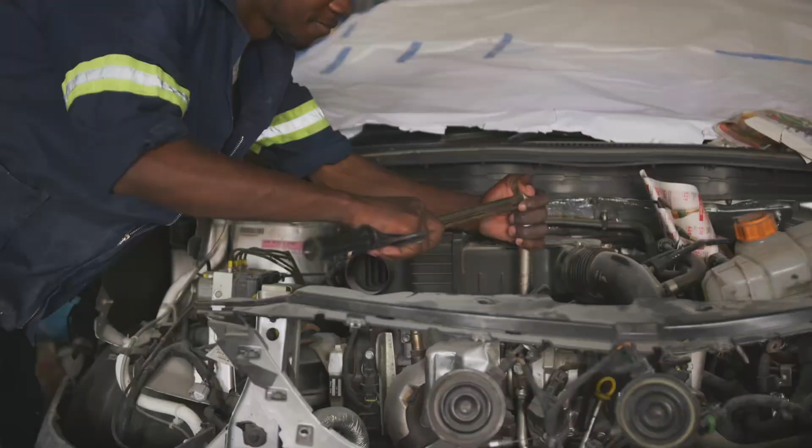Want your car to last over 500,000 miles without a single major repair? It's not magic. It's daily habits that 99% of drivers ignore. And at the end, a bonus tip no one talks about. It could save you thousands, so watch till the end.

Habit number 1. Protect your engine from the first minute. Every engine start is a stress test, especially when the engine is cold. Many drivers still believe it's good to let the car idle for 5 minutes before driving. But the truth is, your engine doesn't need to sit. It needs to move, gently and with minimal load.

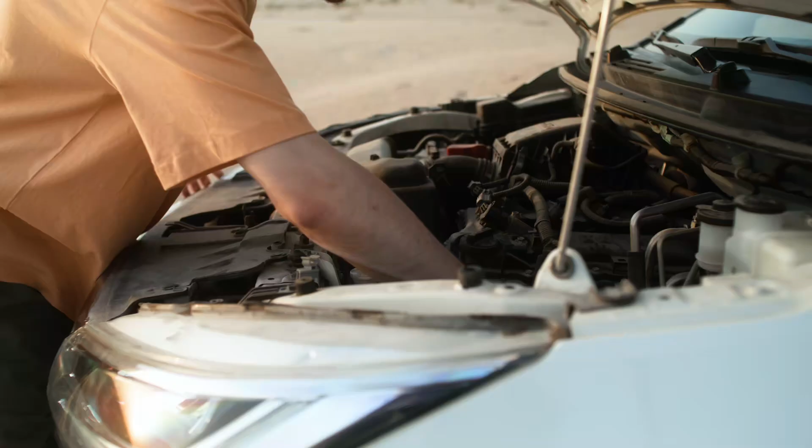When you start the engine, oil hasn't yet reached critical components like the camshaft, bearings, or turbo if your car has one. So if you rev the engine or accelerate hard right away, you're creating direct metal-on-metal contact. This kind of wear isn't noticeable at first, but over time it builds up and it drastically shortens your engine's life. So what should you do instead?

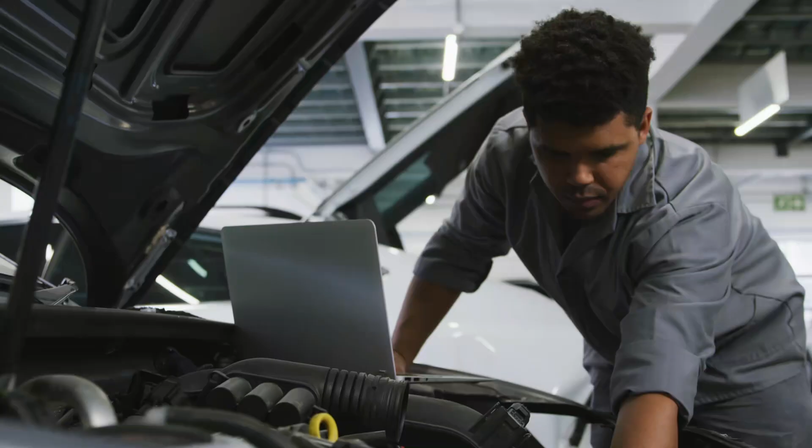Start the engine, wait 15 to 30 seconds, just enough for the oil to start circulating. Then begin driving slowly and smoothly. Keep RPMs low, avoid aggressive throttle or braking. Let the engine warm up under light load, exactly as it was designed to. This one simple habit done daily can extend your engine's life by hundreds of thousands of miles. If you want your car to reach 500,000 miles or more without a major repair, it all starts with the first 5 minutes of every drive.

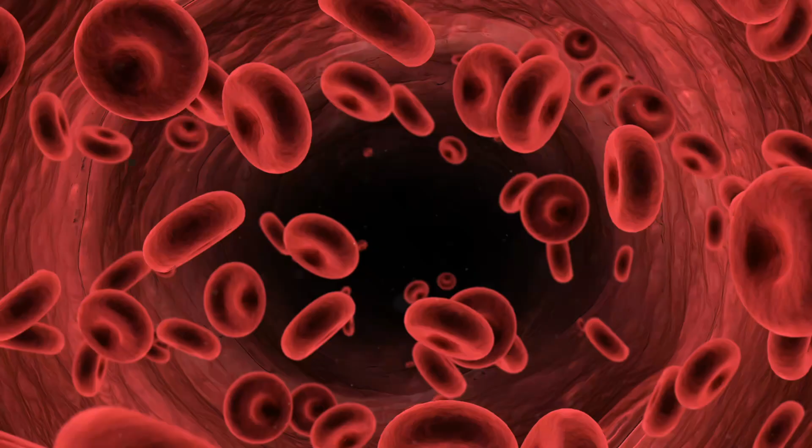Habit number 2. Check your oil like a pilot, not a passenger. Most drivers ignore their oil until the dashboard light blinks. By then, it's already too late. Engine oil is the lifeblood of your car. It cools, cleans, lubricates, and protects everything inside your engine. Driving with low or dirty oil is like running a marathon in flip-flops. You might move, but you're wrecking everything with every step.

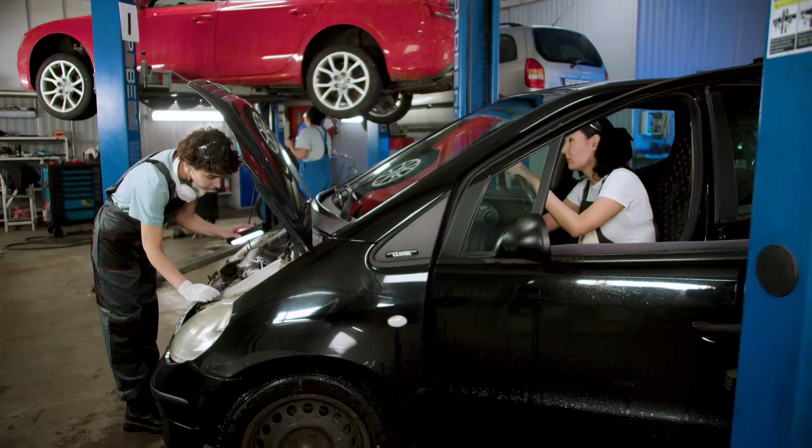So here's the habit. Check your oil at least once every 2 weeks. Pop the hood, pull the dipstick, and take 30 seconds to look at the color, texture, and level. Is it dark and gritty? Time to change it. Is it low? Top it up immediately. Even running half a quart low can cause long-term engine damage.

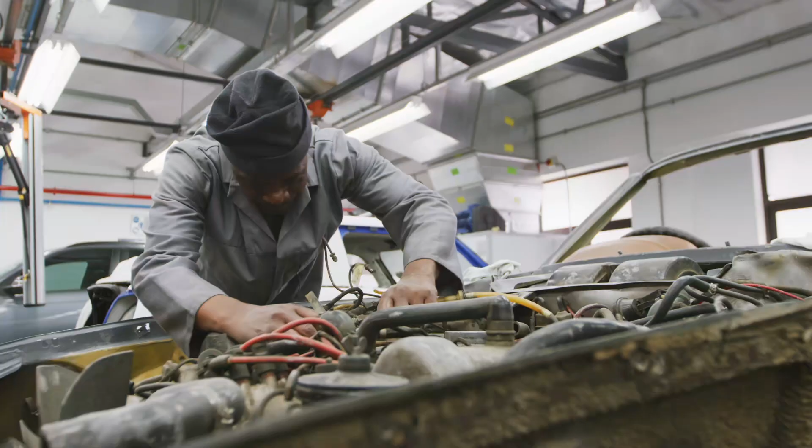Modern engines, driving conditions, and oil types vary. Some cars need oil changes every 3,000 miles. Others can go 10,000 plus. Check your manual and build a habit around that, not vague internet advice. Remember, it's cheaper to buy oil than a new engine. A bottle of synthetic oil costs $10. A rebuilt engine? $4,000 and months of headaches. Want to hit 500,000 miles? It starts with checking the dipstick before trouble checks you.

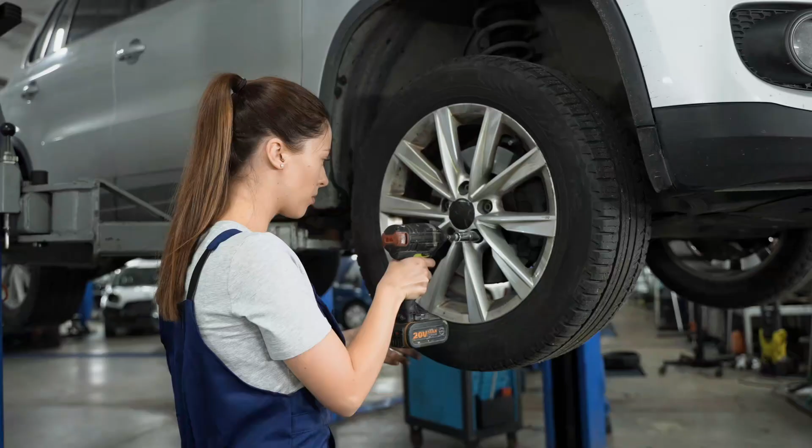Habit number 3. Listen to your tires. Your tires are the only part of your car that actually touches the road, but most drivers forget about them until something goes wrong. Underinflated or worn-out tires make your car handle worse, stop slower, and wear out your suspension faster. Here's a simple habit. Check your tire pressure once a week. It takes less than a minute and can save you a lot of money. Low pressure means more heat, faster wear, and even a higher risk of a blowout. Too much pressure? You lose grip, especially in the rain.

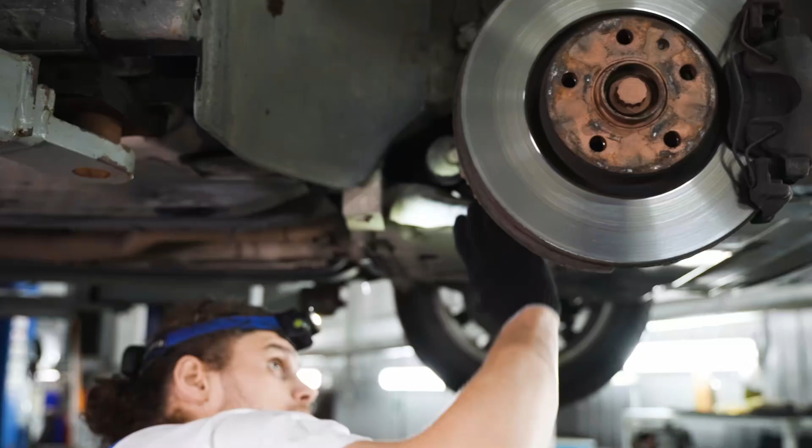Also, take a look at the tread. If it's wearing unevenly, you might have an alignment or suspension issue. It's easy to miss, but it affects how your car drives every single day. And don't forget to rotate your tires every 5,000 to 6,000 miles. That helps them wear evenly and keeps your handling sharp. Taking care of your tires isn't just about saving money. It's about staying safe. Check the pressure, look at the wear, and your car will thank you every time you hit the road.

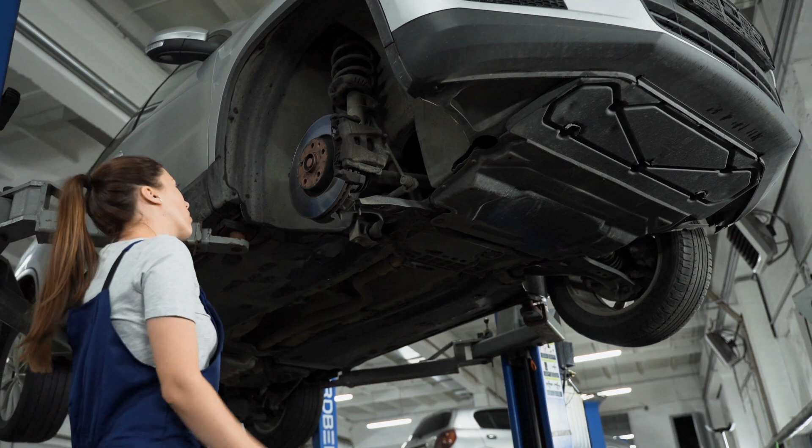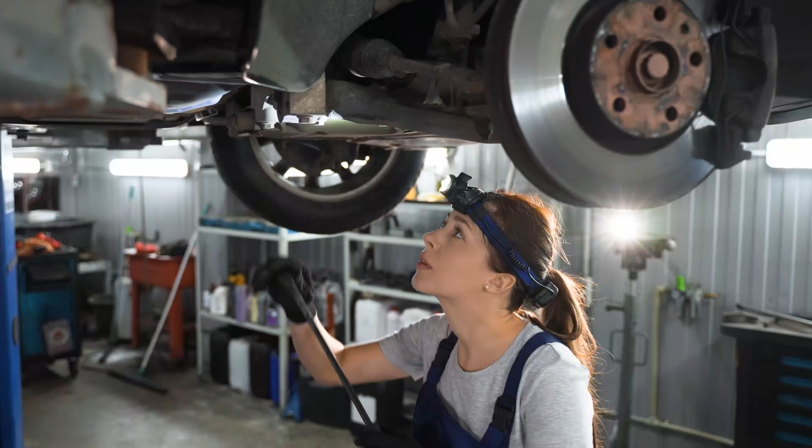Habit number 4. Stop riding the brakes. Riding the brakes, like holding your foot on the pedal while coasting, is a habit many drivers pick up without noticing. But it's one of the fastest ways to wear out your brake pads, overheat your rotors, and reduce stopping power when you need it most. Brakes are designed for short, controlled use, not constant pressure. If you're always tapping the pedal in traffic or holding it downhill, you're cooking your brake system bit by bit.

So what's the better habit? Learn to coast. If you see a red light ahead or you're going downhill, take your foot off the gas and let the car slow down naturally. Use engine braking when possible. Drop into a lower gear if your car allows it. This reduces brake wear, keeps them cool, and gives you smoother control overall. Also, maintain a safe distance from the car in front.

It gives you more time to react, and you won't need to brake constantly just to avoid tailgating. And when it's time to stop, brake with intention. Firm, steady pressure is better than little, nervous taps. Your brakes are a safety tool, not a security blanket. Use them right, and they'll stay strong, reliable, and ready when you truly need them.

Habit number 5. Pay attention to warning lights. Warning lights aren't just annoying little icons. They're your car's early warning system. But too often, drivers see one pop up and think, hey, I'll deal with it later. Then days go by and suddenly a simple issue turns into a $1,000 repair.

Modern vehicles are filled with smart sensors. They monitor your oil pressure, engine temperature, tire pressure, emissions, everything. So when one of those lights comes on, it's your car saying, hey, something's not quite right. Please check. Sometimes it's something simple, a loose gas cap, low tire pressure. Other times it's serious, like a misfire, a failing oxygen sensor, or overheating.

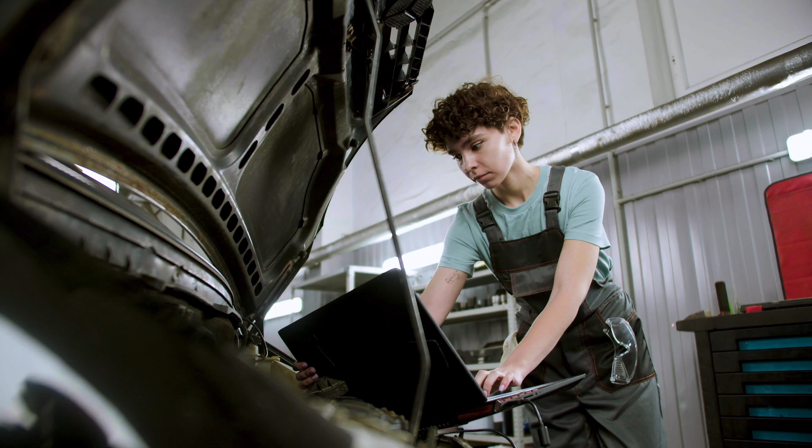So here's the habit. Don't ignore it. Take a photo of the light. Check your manual or Google what it means. If it's flashing, especially red or orange, pull over. That means stop now, not later.

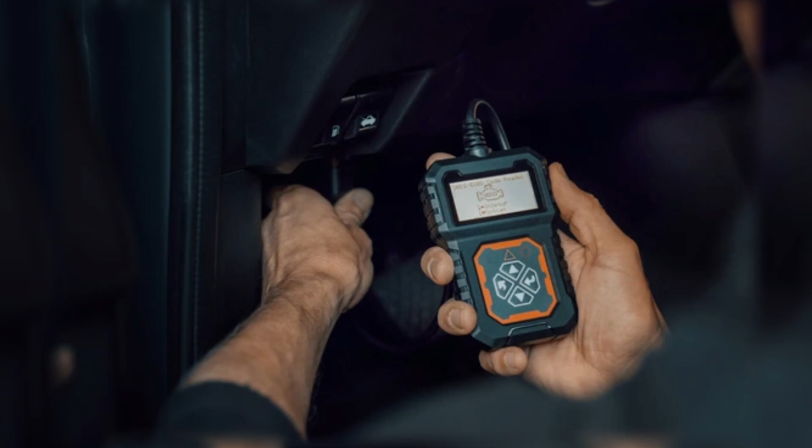And here's a bonus tip. Get an OBD2 scanner. They're cheap and super easy to use. You plug it into your car and it tells you exactly what's wrong. Your car can't talk, but the dashboard is its way of sending a message. Don't wait until silence turns into breakdown.

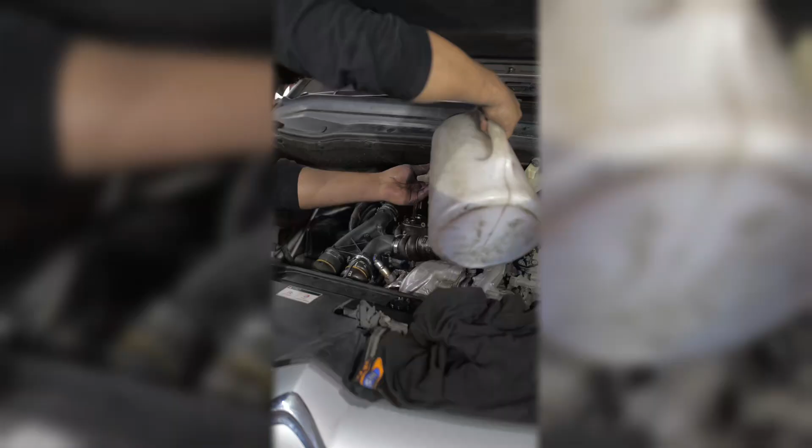Habit number 6. Keep your cooling system in check. Engines hate heat, and one of the quickest ways to destroy an otherwise reliable engine is to let it overheat just once. That's why your cooling system is so critical, yet often overlooked. Coolant, radiator, water pump, thermostat. These parts quietly keep your engine alive every mile you drive.

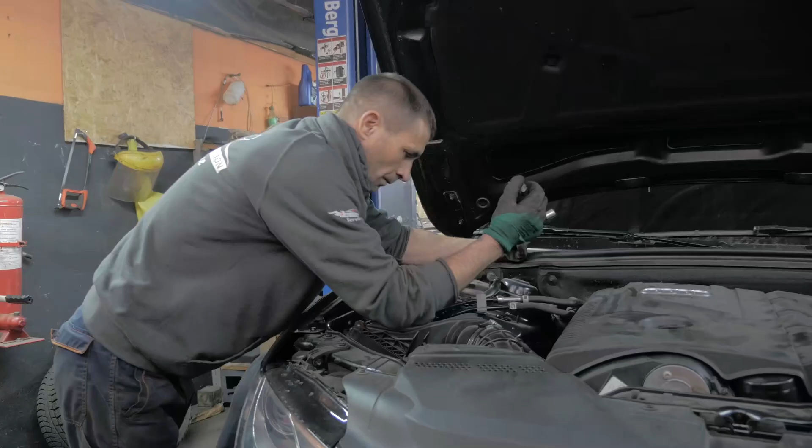But coolant breaks down over time. Hoses crack, radiators clog, and if you're not checking them regularly, the damage can sneak up fast. So here's the habit. Don't wait for the temperature needle to spike. Check your coolant level once a month. If it's low, find out why. Never just top it off and forget it.

Also, pay attention to your temperature gauge. If you notice it running hotter than usual, even just a little, that's not normal. That's your engine warning you. Flush your cooling system every few years, based on your vehicle's manual, and replace your thermostat and hoses before they become brittle and fail. An engine can survive a lot, but not heat.

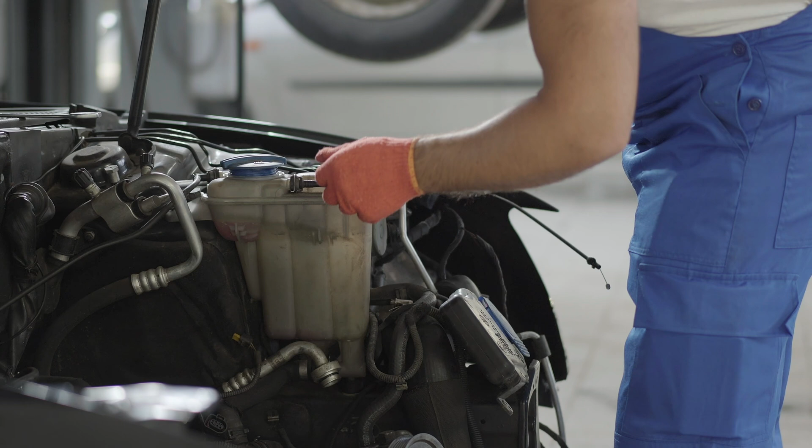One overheating incident can warp metal, crack the head gasket, and leave you stranded with a smoking hood. Respect your cooling system, and it'll quietly protect your engine for hundreds of thousands of miles.

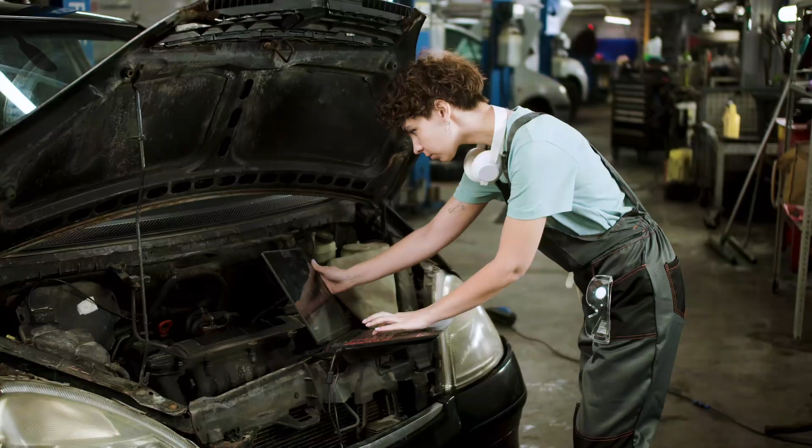Habit number 7. Let your transmission breathe. Most drivers don't think about their transmission until it starts slipping, jerking, or making weird sounds. By then, it's usually too late. But the truth is, your transmission works just as hard as your engine. It needs just as much care and just as much respect.

Every time you accelerate, slow down, climb a hill, or tow something heavy, your transmission is doing the heavy lifting behind the scenes. It generates heat. It relies on clean, healthy fluid to keep everything running smoothly. So here's the habit. Treat your transmission like the expensive, complex machine it is.

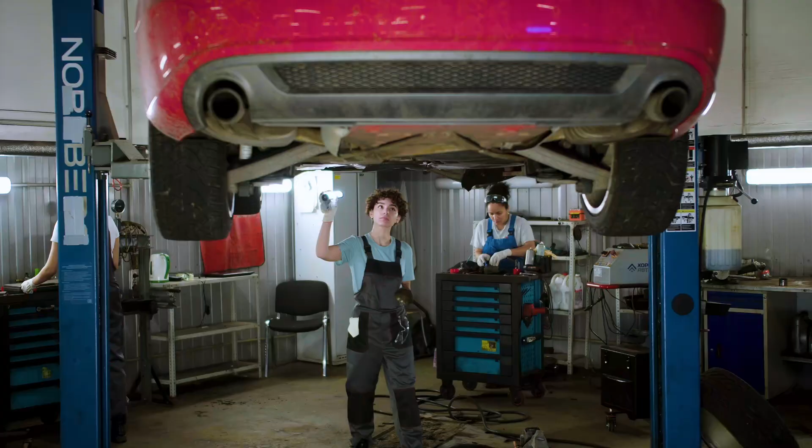Check your transmission fluid regularly. It should be bright, not burnt. If it smells off or looks dark, don't ignore it. And most importantly, change the fluid when your manual says to. Skipping that service is like never changing your engine oil. Only worse, because transmission repairs often cost more.

Also, avoid sudden shifts from reverse to drive. Let the car stop completely before switching gears. Don't slam into drive when you're rolling backward. That's a shortcut to long-term damage. If you drive a truck or tow a lot, consider installing an auxiliary transmission cooler. It reduces heat, and heat is what kills transmissions. Give your transmission a chance to breathe and work smoothly, and it'll give you a ride that lasts for decades.

Habit number 8. Don't ignore small noises. You know that little squeak when you turn the wheel? Or that faint grinding when you brake? Most people hear it, shrug, and think it's probably nothing. But those tiny sounds are like whispers from your car, telling you that something's wearing out.

No modern vehicle is ever truly silent, but the key is to know your car's normal sounds, so you can spot when something changes. Because small noises rarely stay small. They grow, they spread, and by the time you really hear them, you've already got a bigger problem. So here's the habit. Don't turn up the radio. Listen. Every week or two, drive with the windows down, no music, and just pay attention.

Turn the wheel, hit the brakes, feel and hear what's going on. A clicking sound in the front could be a worn CV joint. A squeak during braking? Maybe your pads are thin. A clunk from the rear? Possibly a loose suspension part.

The earlier you catch it, the cheaper it is to fix. And sometimes catching it early means you avoid a breakdown completely. Your car doesn't speak in words, but it does speak in sounds. The question is, are you listening?

Habit number 9. Wash your car. For real. Washing your car isn't just about looks. It's real maintenance, especially if you live where there's snow, rain, salt, or dust. Because over time, dirt and chemicals eat away at your paint, your trim, your undercarriage, and yes, even the frame.

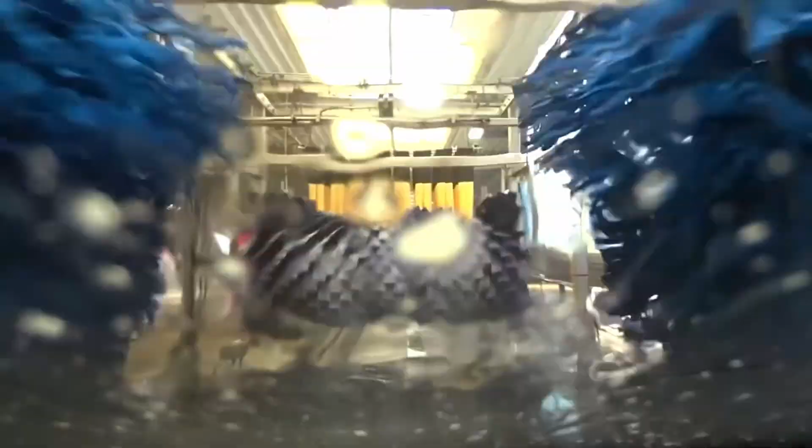And don't stop at the surface. Use a pressure washer or drive-through wash that includes an underbody spray. That's where salt and sand hide and do the most damage. Waxing a few times a year helps too. It adds a layer of protection and makes it easier to wash next time.

And don't forget the inside. Vacuuming, wiping, and keeping moisture out helps prevent mold and musty smells. Bottom line, a clean car runs the same, but lasts longer. And when it comes time to sell, a well-maintained body can add thousands to its value.

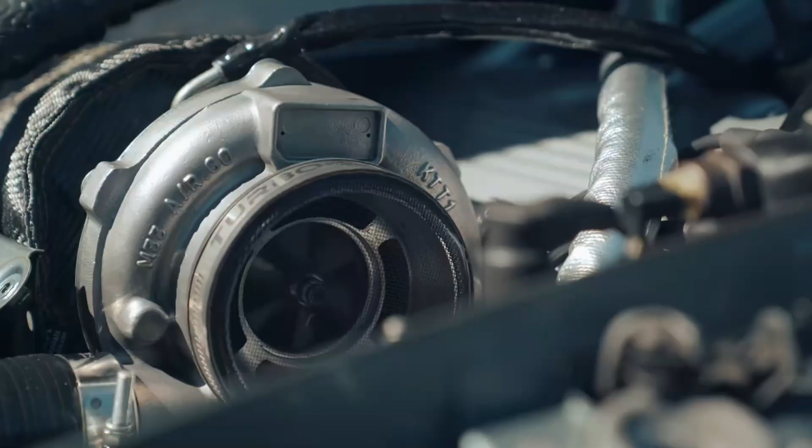Habit number 10. Drive gently every day. How you drive, not once, but every single day, quietly determines how long your car will last. And the truth is, no amount of oil changes or tire rotations can undo the damage of aggressive driving habits. Hard launches, stomping on the brakes, sharp cornering, they wear down your suspension, your brake system, your transmission, and your engine. And it doesn't happen all at once. It's gradual, over thousands of miles, until parts start failing one by one.

Even small habits matter. Revving your engine in the morning before it's warmed up, that's extra wear. Slamming into drive from reverse without stopping, that's a hit to your transmission. Flying over speed bumps without slowing, you're pounding the suspension every time. So here's the better habit. Treat your car like it's meant to last 20 years, because it can.

Accelerate smoothly. Brake in advance. Let the engine warm up on its own while you drive gently for the first few minutes. Use engine braking on downhills instead of riding the brakes. Shift gears only when the car is fully stopped, and avoid flooring it just to beat the car next to you.

Smooth driving isn't slow, it's smart. It reduces wear on nearly every part of your vehicle. And in the long run, it means fewer repairs, better fuel economy, and a car that still feels solid at 300,000 miles.

Habit number 11. Drive long enough. Here's something most drivers don't think about. If your daily drives are just 5 or 10 minutes long, like a quick trip to the store or school, your car may not be getting the time it needs to stay healthy. Engines are built to reach full operating temperature. That's when oil flows properly, moisture evaporates, fuel burns cleanly, and carbon doesn't build up.

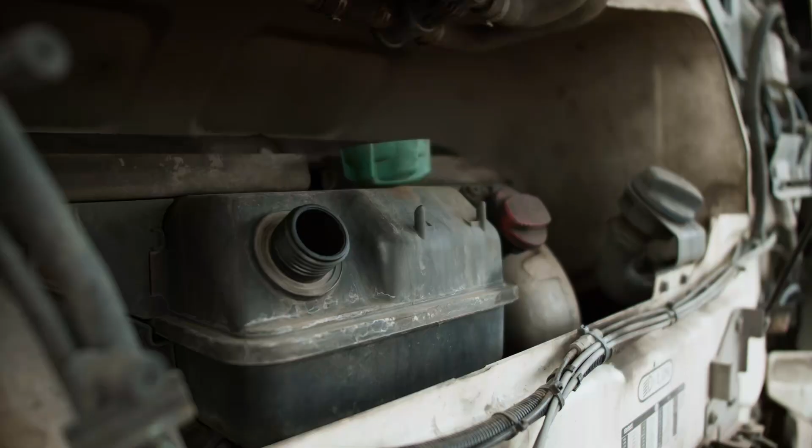But when you only take short trips, your car never really gets there. Condensation builds up in the exhaust. Oil doesn't circulate fully. Over time, this leads to buildup, corrosion, and even engine wear. So here's the habit. Once or twice a week, go for a longer drive. Combine errands. Take the scenic route.

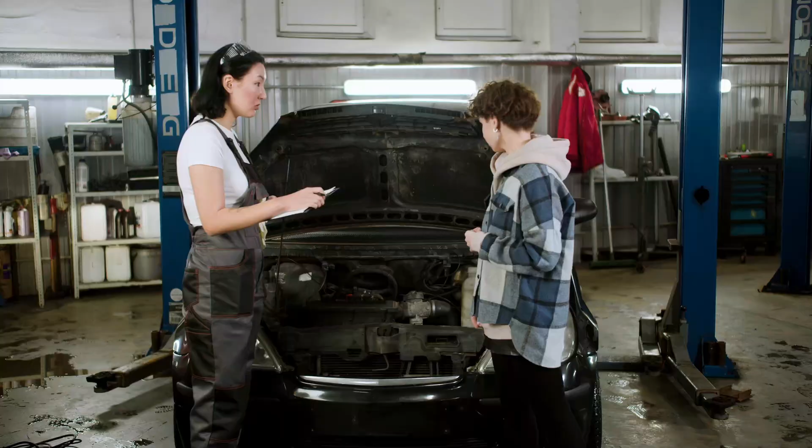Drive at steady speeds for 20-30 minutes so the engine can fully warm up and the systems can do what they're designed to do. This also helps your battery stay charged and protects your catalytic converter, which needs proper heat to burn off residue. Short drives are convenient, sure, but too many of them all the time, and your car never gets to breathe. Give it time to stretch its legs once in a while. It'll thank you with better performance and a much longer life.

Habit number 12. Stop overfilling your fuel tank. You pull into a gas station, fill up the tank, and when the nozzle clicks, you squeeze in a little more just to top it off. Sound familiar? Most people do it without thinking. But here's the problem. That extra splash of fuel can quietly damage your car's emission system. Modern vehicles have a system called EVAP.

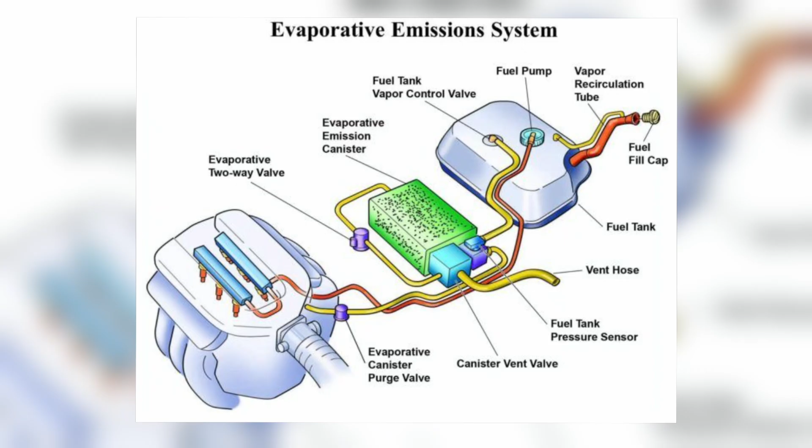It captures fuel vapors before they escape into the air. It includes sensors, filters, and a charcoal canister. When you overfill the tank, liquid fuel, not just vapor, can enter that system. And it's not designed to handle liquid. Over time, this can flood the charcoal canister, clog valves, and trigger the dreaded check engine light. And these repairs often cost hundreds of dollars.

So here's the better habit. When the gas pump clicks off, stop. That's not a suggestion. That's the pump detecting back pressure, telling you the tank is full. Resist the urge to round up to the nearest dollar. That few extra cents could cost you a lot more later. It's a small habit that takes zero effort, but it protects your fuel system, prevents vapor leaks, and helps keep your car running clean and efficient.

Habit number 13. Park smart, not just fast. Where and how you park your car might not seem like a big deal, but over time, it plays a bigger role in your car's condition than you think. Parking under trees can expose your paint to sap, pollen, bird droppings, and constant moisture, all of which slowly eat through your clear coat. Leaving your car in direct sun every day can fade your paint, crack your dashboard, and overheat sensitive electronics. And constantly squeezing into tight spaces, that's just asking for door dings and bumper scratches.

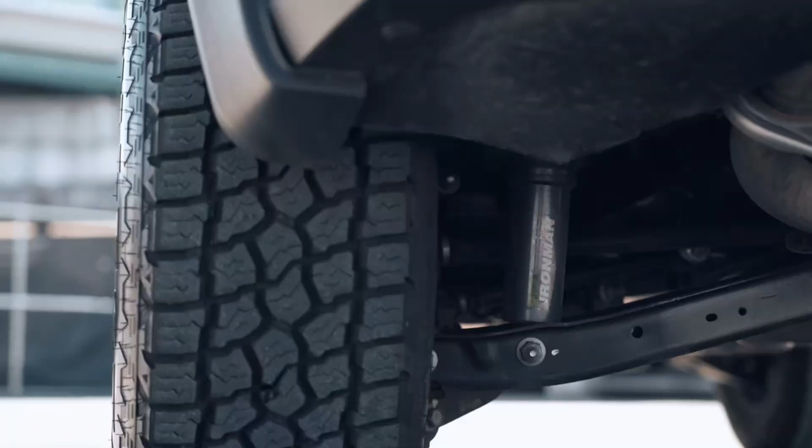So here's the better habit. Be intentional about where you leave your car. If there's shade, choose it, but not if it means parking under a messy tree. Avoid low spots where water pools, especially after rain. And if you can, park in a garage or undercover, not just in summer, but year-round. Also, park straight. It sounds basic, but angled parking puts stress on your tires and suspension over time, especially if the wheels are turned when you shut off the engine.

And one more thing, don't rest your foot on the brake when parked at lights. Use neutral and the handbrake when safe. It reduces brake wear and protects the transmission. Smart parking isn't just about convenience. It's quiet, daily protection for your paint, parts, and long-term value.

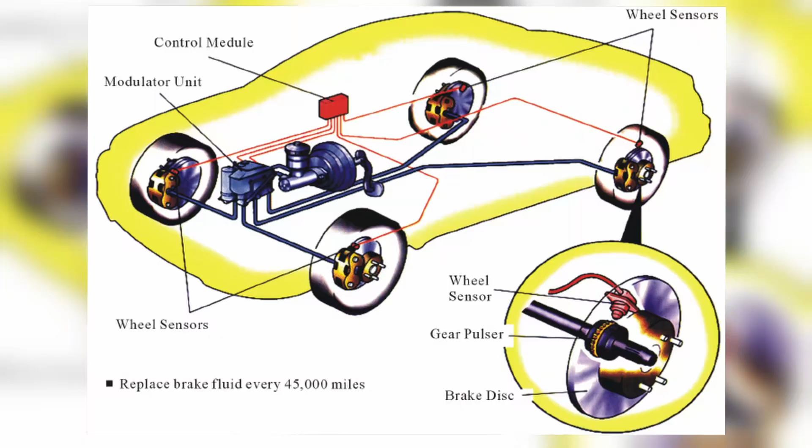Habit number 14. Learn your warning lights. Most drivers know the basics, the oil light, the battery, the check engine symbol. But what about the ABS light, the TPMS, the traction control warning? Modern cars have dozens of warning lights. Each one is there for a reason, and ignoring them, even for a week, can turn a small issue into a major repair. So here's the habit.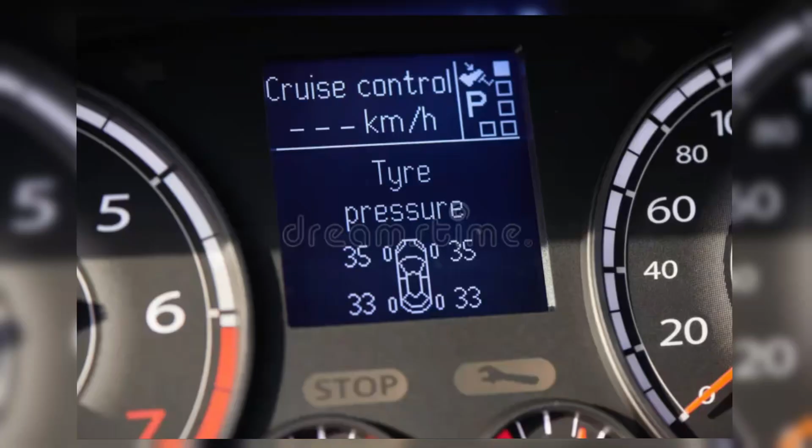Spend 10 minutes getting to know your dashboard. Pull out your manual or look up your make and model online. Understand what each symbol means, what's urgent and what's not. For example, a flashing check engine light usually means an active misfire that can damage your catalytic converter. That's immediate. But a solid light? Still serious, but not as urgent. A TPMS light means your tire pressure is low, easy to fix, but dangerous to ignore.

And here's the key. Never guess. If a warning light pops up, take a picture, look it up, and if needed, get a scan from an OBD2 reader or at your local shop. Cars today are smart. They're constantly telling you how they feel. Your job? Just pay attention. The more you understand those little lights, the more control you have over your car's health and repair bills.

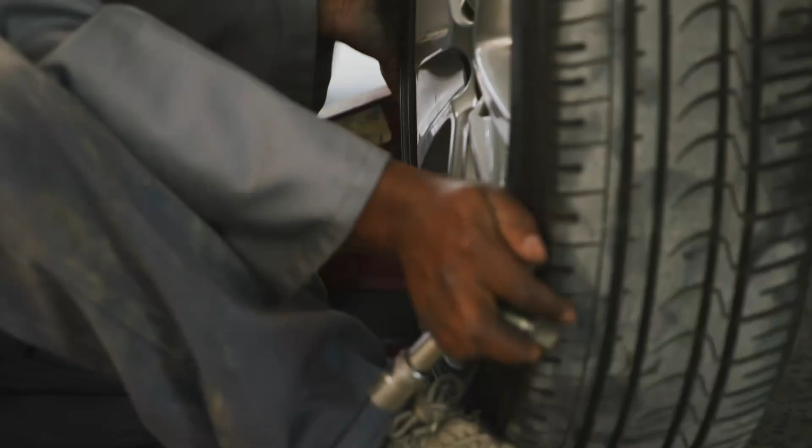Habit number 15. Rotate your tires regularly. Here's something simple that most people skip, and it costs them hundreds down the line. Tire rotation. Front tires don't wear the same as rear ones. On front-wheel drive cars, the front tires handle steering, most of the braking, and all the engine power. That means they wear out faster, especially on the edges. If you never rotate them, you'll end up replacing your front tires way before the rear ones. And even worse, you'll have uneven grip, reduced handling, and worse braking performance.

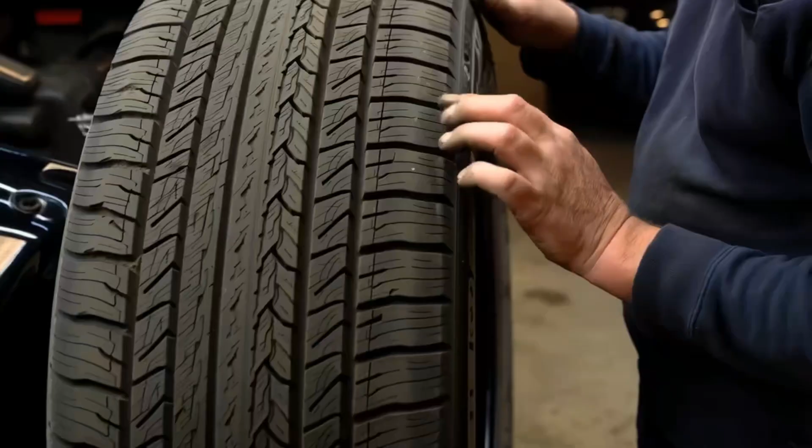So here's the habit. Rotate your tires every 8,000 to 10,000 kilometers, or every oil change if you like it simple. Most shops can do it in under 20 minutes, and some will even include it free with other service. Rotating your tires means swapping front to rear, and sometimes side to side, depending on your car's layout. The result? Even wear, better traction, smoother ride, and longer tire life overall.

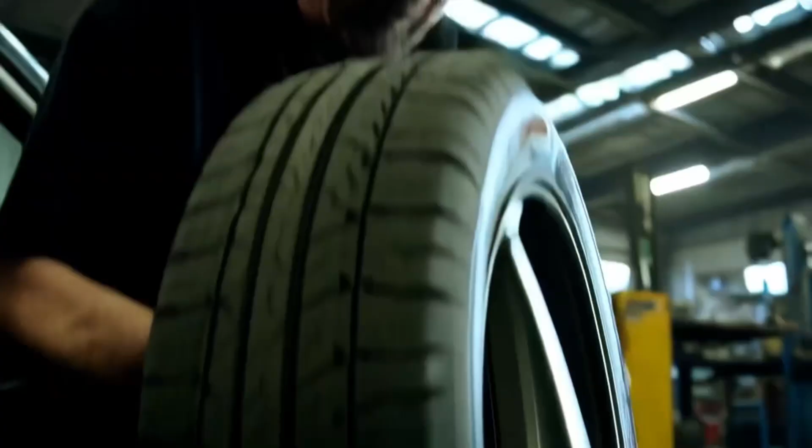And don't forget to get your alignment checked once a year too. If your tires are wearing unevenly, that's usually a sign something else is off. Tires aren't cheap, but this small habit can easily double their lifespan.